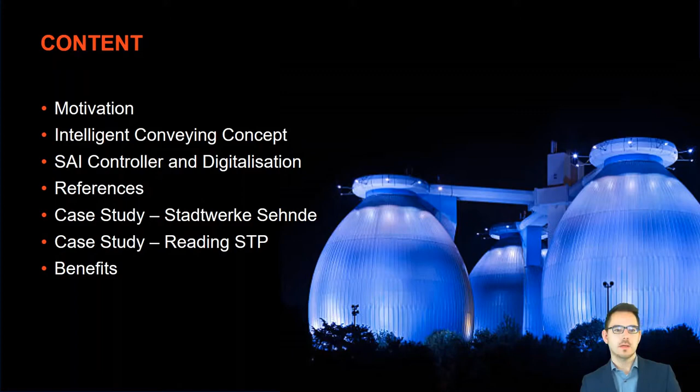I would like to start with a short motivation of this topic - why has SEEPEX investigated this new conveying technology? That is followed by a short description of the conveying concept and also the SAI logic and control strategy. Then we switch over to the practical part, where I would like to show you some references and also two case studies that we've drawn from Stadtwerke Sehnde in Germany and also Thames Water in Reading, where we've investigated the TCO and the savings that we could achieve by these systems.

But let's start first of all with the motivation. So where did we investigate a new product for the conveyance of dewatered sludge? That comes from the market - we see increasing requirements, especially due to newer EU regulations for fertilization and sewage sludge regulations.

We see that the common processes of handling your dewatered sludge are changing. Phosphate must be regained, and it cannot go to the landscape anymore due to nitrate loading in your grounds, so we need to go to incineration more and more. These established processes on our plants are changing, and since the building density of most wastewater treatment plants is rather high, it quite often occurs that longer distances need to be conveyed with the dewatered sludge.

Another aspect we see here is that life cycle costs are more often considered, especially by larger water authorities, and that's directly connected to energy efficiency of your equipment. Especially for larger equipment on your plant, easy and fast maintenance is always an issue because it's always related to the downtime in your processes, and to handle and stay with your process, maintenance is always important.

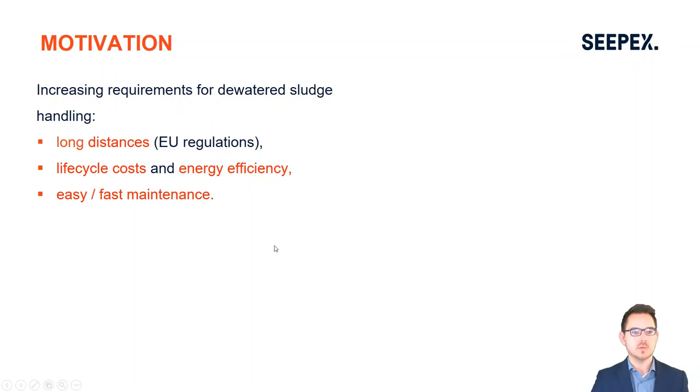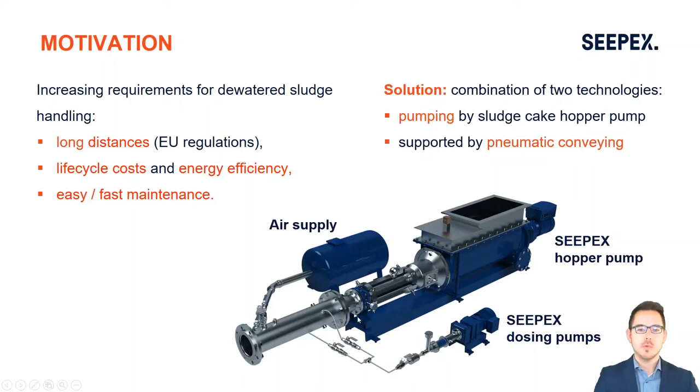Our solution is a combination of two known technologies: pumping by a progressive cavity pump - that's really SEEPEX's bread and butter product - here a hopper pump conveying the dewatered sludge, combined with and supported by a pneumatic way of conveying, which we call pneumatic dense phase conveying.

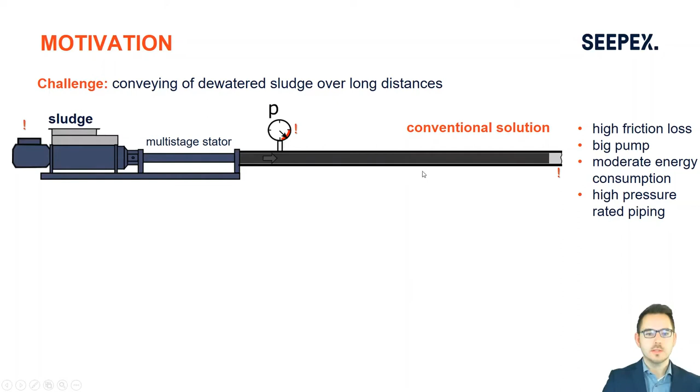Let's come first to a comparison with the conventional way of conveying dewatered sludge to see the benefits of SAI. The challenge in conveying dewatered sludge lies in the high viscosity, and this high viscosity leads to rather high pressure losses in your pipework from the usual way of pumping it through the system. In the end, we're restricted by these pressure losses in the distance we could convey, because the pressure increases more and more, and you need very large high pressure pumps to overcome this. High pressure pumps come with a large motor and consume a high amount of energy. On the plant side, you need high pressure rating for all your piping and equipment, which is quite expensive on the investment side.

If you compare this to smart air injection, the main benefit and feature we generate by SAI is that we bring down the discharge pressure to a very minimum of only 2 to 3 bar. That's achieved by this discontinuous way of conveying the medium in plugs - plugs of dewatered sludge are generated by our pump conveying the medium into the discharge pipe.

We surround it with a lubrication fluid, usually a polymer solution that's always present on your plant. Then we build up these 10 to 15 meter plugs of medium, and once built, accelerate those plugs by pneumatics - using the pneumatics to convey it further down the line and shoot these packages of dewatered sludge. This is used very purposefully, only for a short term, and helps us reduce the pressure inside your pipework to a minimum of only 2 bar, because we reduce frictional losses.

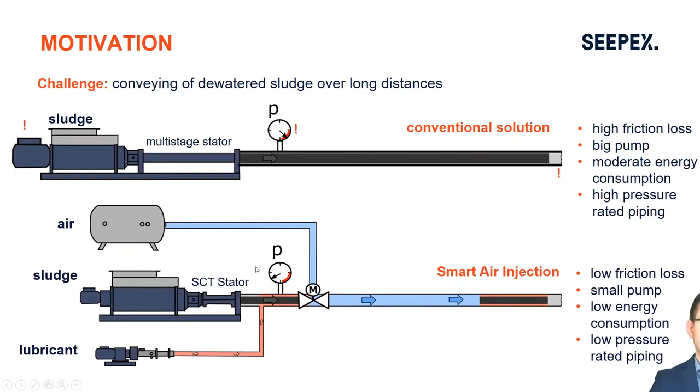That leads to the fact that we only need a small pressure pump, which comes along with a very small engine and motor. And on the other side of your plant, you can also apply very low pressure rated pipework, and plastic pipework can be used for multiple hundreds of meters of conveying distance.

What are the benefits you receive? We reduce your operational costs significantly, because the total energy consumed by an SAI system compared to a conventional solution is much less. Maintenance costs are also reduced because spare parts are small and cheaper, and due to the low pressure, the lifetime of all components is highly increased.

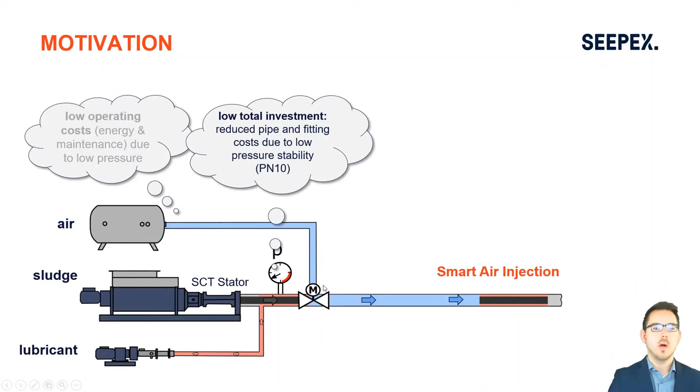Another effect is that we reduce your investment costs, since all the pipework and fittings are only low pressure rated at PN10, compared to conventional solutions that are often PN100 and even more.

We've achieved a very flexible pipework layout that can be planned for your plant. Multiple bends are not an issue for us, and vertical elevation of up to 30 meters and more can be achieved by smart air injection.

We also achieve a very long transportation distance due to the fact that we use pneumatic dense phase conveying. We could achieve 1 kilometer of transportation distance, which is not possible with any other conventional solution.

We reduce downtime of the process because we use a small pump with maintenance-in-place abilities, so you could exchange any wear parts on service issues in less than 1 hour, without any dismantling of pipework. And since we only act against 2 or 3 bar of pressure, the lifetime of all components is highly increased.

We have pneumatics in our system, and that's why we also have the ability to do pipe cleaning before longer downtimes, especially in winter time where you usually need backup heating for your pipework before longer downtimes.

That's not required with an SAI system, because we blow the entire pipework free with pneumatics and air before longer downtimes over the weekend. If you restart on Mondays in winter, it's not an issue, and you can restart your process without any backup heating, which is also a good benefit on the investment cost side for your plant.

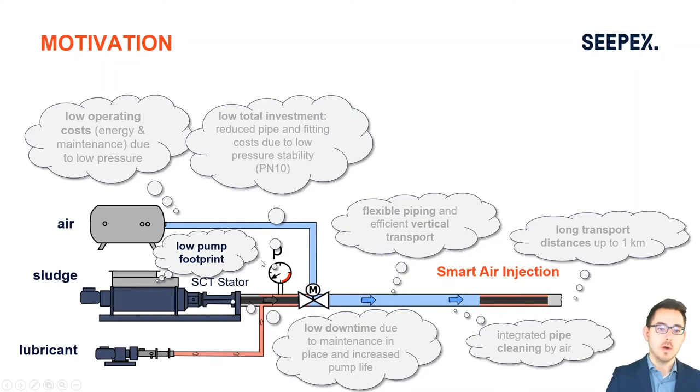If I tell you now that we have a pneumatic system that is very efficient, you might say, I don't believe you. That was also my first reaction, because what I learned in university is that compressors are nearly the worst case scenario on efficiency, since nearly 90% of the energy goes to heat.

But you have to distinguish between the different types of pneumatic conveying to see why it could be efficient. Usually we split into 3 types of pneumatic conveying. First is lean phase, where granular powders are blown with constant air at very high velocities through your pipework. That's rather inefficient, because you have a high amount of air consumed relative to the material conveyed.

Then we have intermediate phase conveying, where you have a swimming bed of medium at the bottom of your pipework, and above it this type of lean phase conveying. Here too, the ratio of air to medium is not the best.

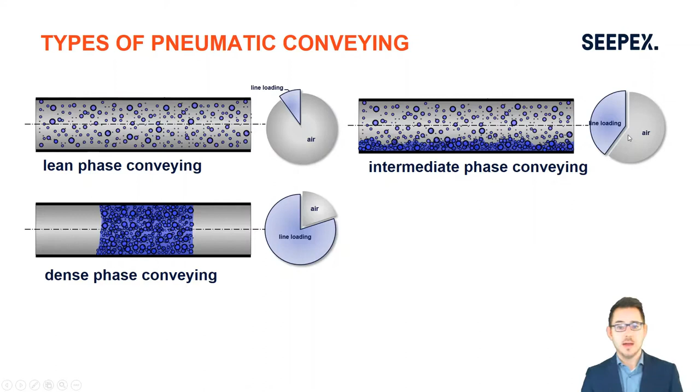What we really use, and the only way that could be efficient, is dense phase conveying. Here you pre-compact packages of dewatered sludge that are then accelerated by purposeful, short air injection and shot down the line like a pneumatic post system.

We even increase the efficiency of these systems by lubricating those plugs with the already present polymer solutions. We build up a layer around those plugs in order to reduce the frictional losses from the pneumatic conveying.

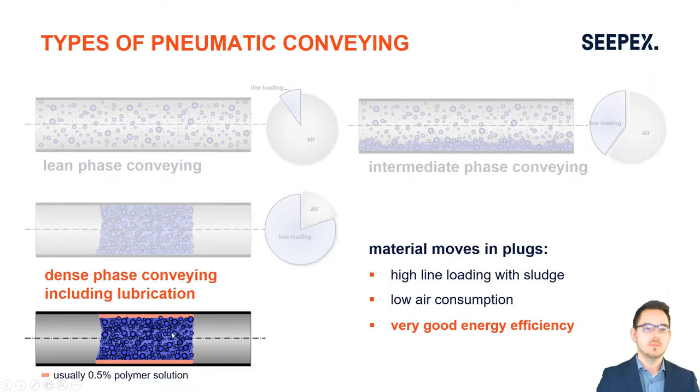Another effect we make use of is the shear thinning rheology of both fluids. Both the dewatered sludge and the polymer solution are highly shear thinning. Shear thinning means, as the name suggests, that under high shear rate the fluid gets thinner and flows more easily. That is directly expressed by this diagram.

So the viscosity is decreasing the more you are shearing your fluid. And that's what we really need, and that's what we use here on these cases. Because the important point is that the shear rates are directly proportional to the velocity inside your pipework. Where you see high shear rates occurring in your pipework, that's where you have the high velocity gradients.

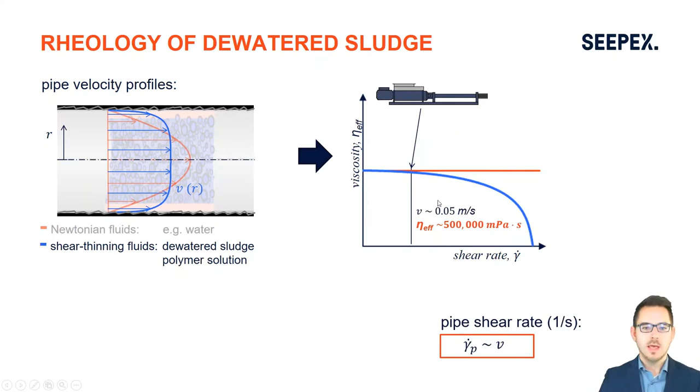Directly in the boundary layer of your pipework, where the high frictional losses occur, we have the highest shear rate. And if we accelerate those plugs by SAI, we increase the shear rate at these locations where the pressure losses occur. If you compare now in this diagram, the usual way of pumping, acting at very slow velocity when the medium is moving by 0.05 meter per second through your pipework, we are in this region where the viscosity is rather high.

For high dewatering content, you speak here about 500,000 mPa·s that could be achieved. But if you accelerate those plugs of medium to very high velocities of 5 meters per second, you reduce at the same time temporarily the viscosity in this boundary layer region of your plugs, where the high shear rates occur. And the factor 10 in reduced viscosity goes directly proportional to the pressure losses, and that's what makes this system so efficient.

A good example to demonstrate this effect is ketchup. It's a children's experiment that you usually do at school in physics, where you put a golf ball on top of a bowl of ketchup, and due to the high viscosity it's sticking on top. But if you let this golf ball fall from a certain distance into the bowl of ketchup, it fluidizes the ketchup, because of the high shear rates that come to this medium on impact by the golf ball on this layer. And that's what we really use here by our SAI system.

Let's look at the process. So how does it look like when the process is started? At the beginning of the conveying, we have nearly zero pressure inside our discharge pipework. Then only the pumps are moving and working, generating this plug material inside the discharge pipework. The pressure signal is successively increasing inside your pipework.

So that's really a measurement signal that we have drawn in a plant in Sweden. Once we reach a region where the plug length is nearly optimal for our conveying process, we open up the solenoid valve, flood the system with 10 bar of compressed air. This overcomes the frictional forces of the plug and accelerates it. So we see a pressure peak in the signal, and then it moves down the line, accelerated to these high velocities until it reaches a destination, which is here inside a silo bottom.

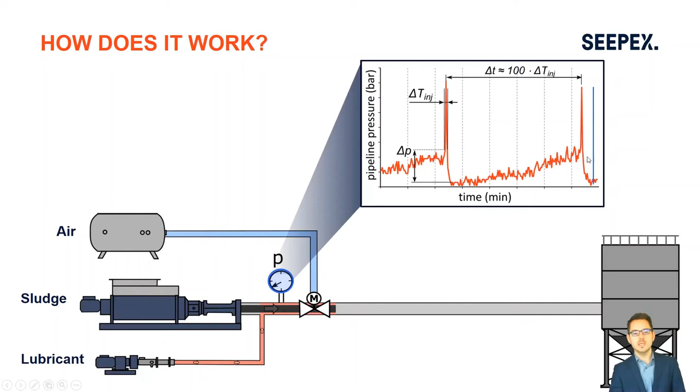And if the pipe is free again, you see that the pressure is decreasing to a very minimum of nearly zero pressure, and the process restarts again.

So let's summarize, how does it work, and how could we reach these very, very low pressures inside the pipework? That's due to 3 reasons. First, we use a lubrication of those plugs in order to reduce locally the frictional losses in the pipework. We make use of a pneumatic way of discontinuous conveying, which is called dense phase conveying. And we make use of the rheology of our fluids, which is shear thinning, and the viscosity is decreased temporarily under high shear rate by this conveying process.

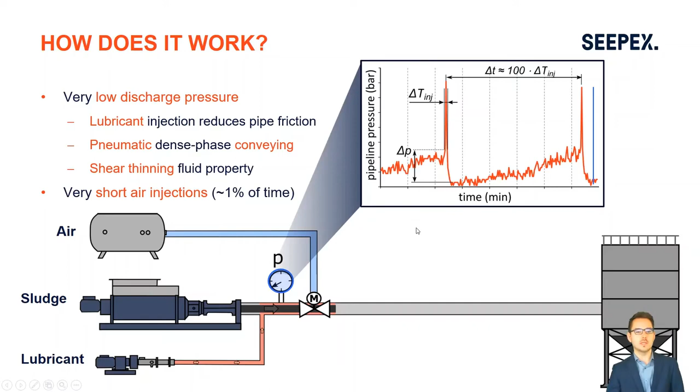In the end, this leads to a very good efficiency, and we only use air very short-term and infrequently in our system, which is roughly around 1% of the total time.

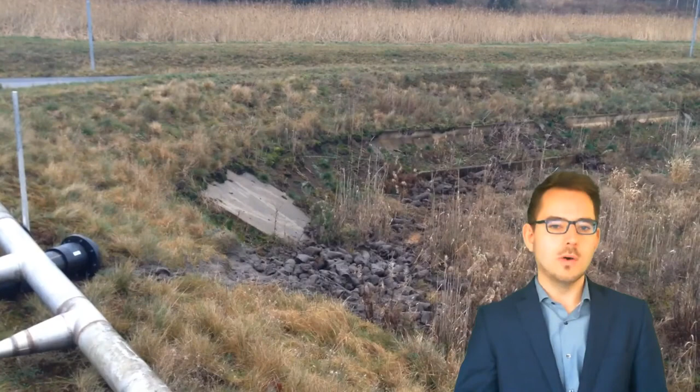If you look now to the pipe outlet, after 500 meters, the outlet where the plugs are shot onto the field - after the injection of air, one plug gets out and is shot onto the field, and that's how it looks like when it comes out. So it works also for 500 meters, and for this case we have not reached more pressure than 5 bar, so we are not at the real limit to convey dewatered sludge over a distance of up to 1 kilometer.

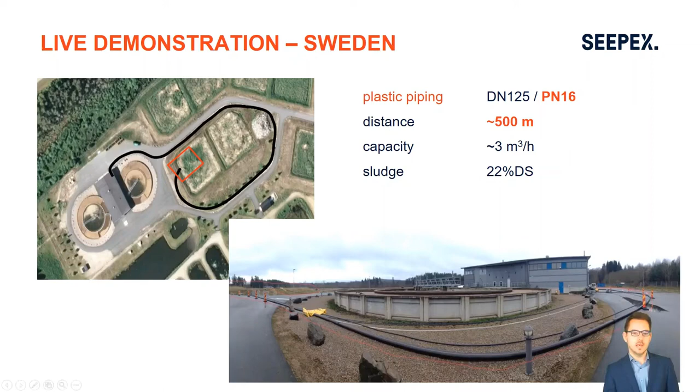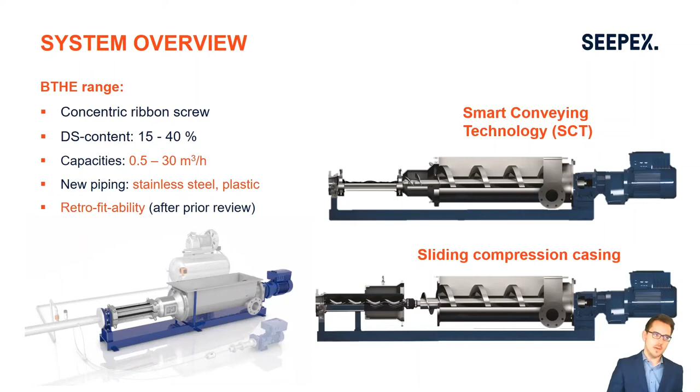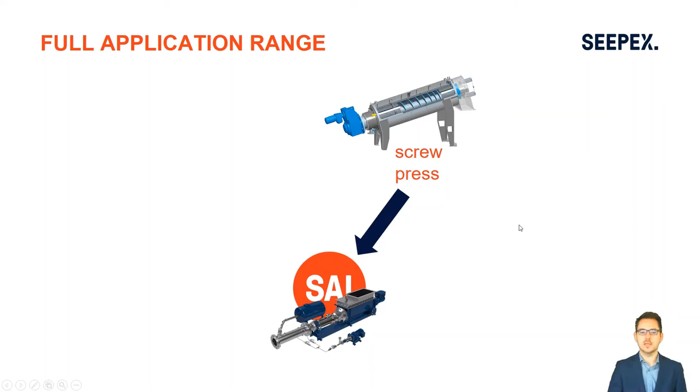The application range we can handle with SAI covers nearly all systems. We have screw presses also fitted with SAI, belt filter presses used for dewatering and conveying with SAI, and filter press installations and centrifuges.

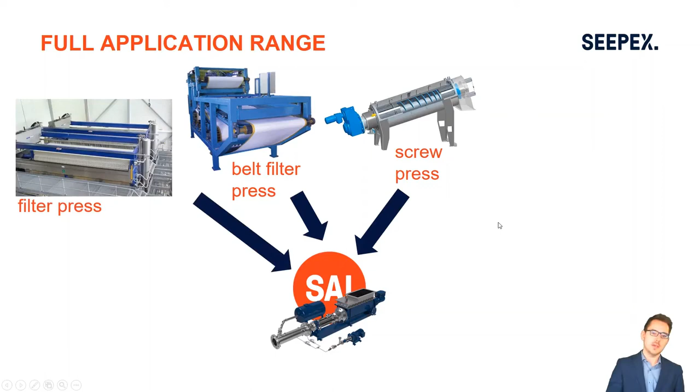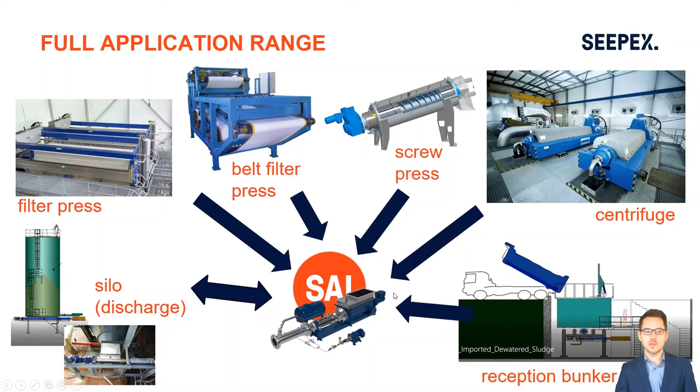We have used SAI to feed into a silo and also as a silo discharge pump placed below the silo. We also have installations placed below a reception bunker, where imported sludge is further conveyed by smart air injection systems. So nearly the full application range of handling dewatered sludge can be covered by smart air injection.

The control logics come together on a so-called SAI controller. What we offer from SEEPEX is a full package unit, meaning a partially automated system product. We include all required machines, all functional components like sensors and actuators, and the control logics, all fed into this SAI controller, where a full visualization of the process runs.

We also have monitoring capabilities and fault diagnostics. This system fully controls itself with regard to flow rates of sludge and lubrication, and air injections are triggered with an optimization algorithm to achieve the best energy efficiency. Safety functionalities are ensured by our control logics, which can be easily integrated into your superior control system through common feedback signals.

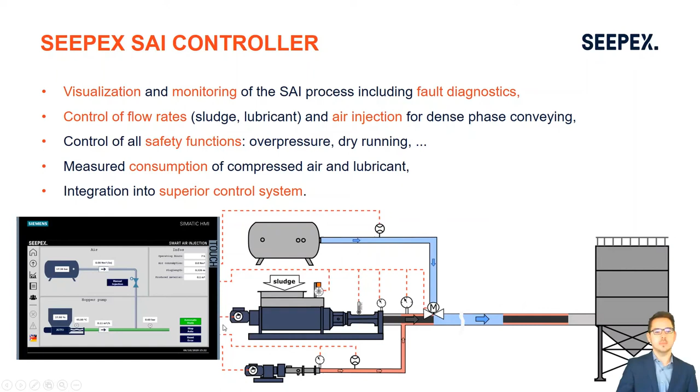We also have a second implementation of this controller logic on Siemens, which comes as pre-compiled component software parts. So if you already have a Siemens controller in your system, we can easily upgrade it with our Siemens logics, and you then run our SAI control logics on your own PLC.

This SAI controller can also be easily integrated into connected services. This enables you, via Bluetooth signal, to get access from everywhere with your mobile phone to the data of your system and how it runs. It also enables a mobile notification service, so overnight or for the service team, you get a notification or warning on high wear or any issues that might occur on your system.

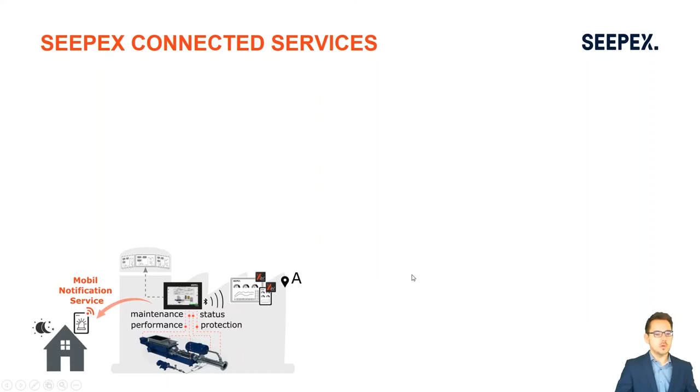And if you have multiple systems monitored by our pump monitoring systems, we can also go into the cloud, where you have an overview of all the pumps running under your pump monitoring system.

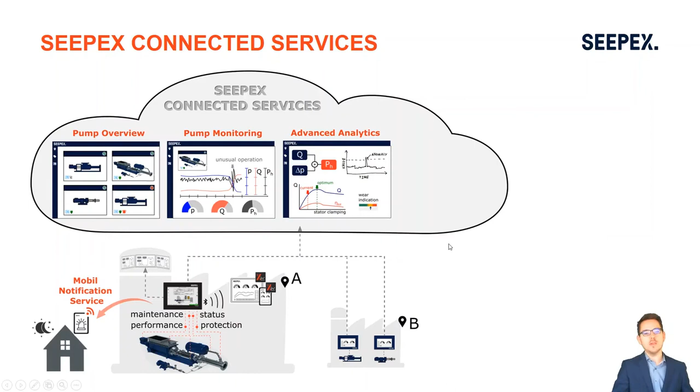You can get access to every pump that is running and see historical data, trend analysis of the pressure, the flow, and also the hydraulic power. We also have the capability with our advanced analytics to do anomaly detection, to define separate KPIs to investigate your system, and the possibility to have a wear indication where the pump operation is compared to the characteristic curve, so you really know about the wear status of your equipment.

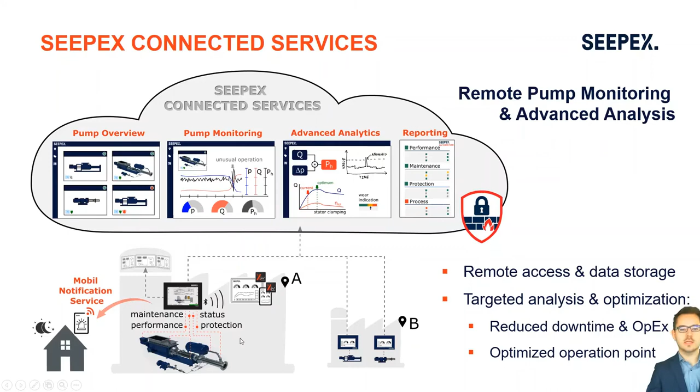In the end, you will receive a reporting every month, where you get a quick overlook about the performance of your system, about maintenance issues, protection issues, and also, if required, on the entire process running in your system.

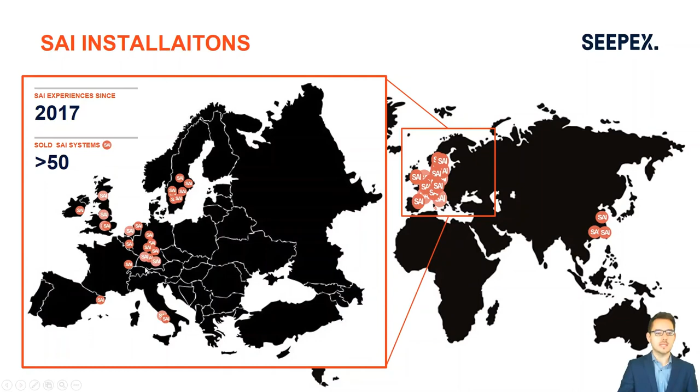Let's come to the more practical part, SAI installations. We are now, since 2017, on the market with smart air injection. Until now, we have installed more than 50 systems in the market, especially here in Central Europe, where most of the systems are in the Nordic region, in Germany, in UK, some in Italy, France, and also Belgium and Netherlands. But let's go into detail for some of those reference plants.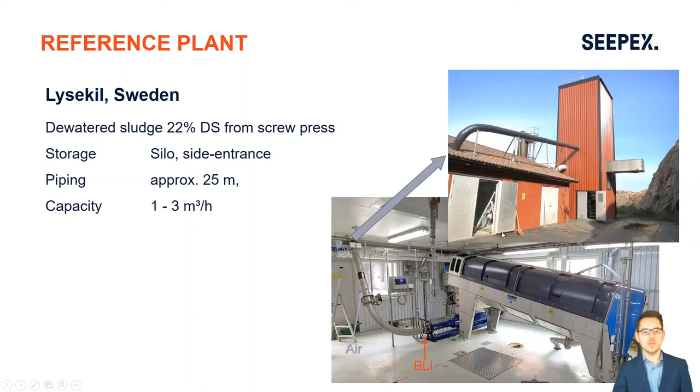What we really see here is an adaptive algorithm that we have triggered. Independent of the fill ratio of this silo, we have adapted the parameterization of the system in order to optimize the energy efficiency of the system.

We have another installation in Sweden, in Strängnäs, where a centrifuge is used for dewatering the sludge onto a dry solid content of 24 to 27%. Then it goes out of the pump and is split to 2 different pipe routes.

We have also integrated these valves into our control logics, so by the controller you can decide if you would like to feed route A or route B. It then goes through underground pipework out of the field and is fed onto a ground storage location—those are the 2 locations where we can decide where the sludge should be conveyed to.

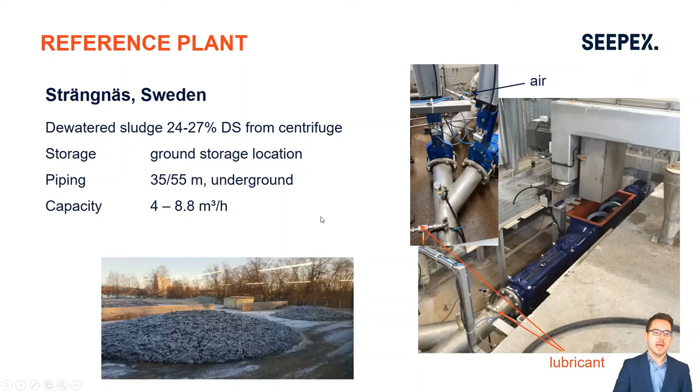The distance was 35 to 55 meters, and the capacity in this case was 4 to 8.8 cubic meters per hour.

Another installation in Hallsberg, Sweden, also has a split directly after our pump to 2 different locations. Here too we have a ground storage installation and underground piping of 50 to 70 meters. The interesting thing here is the very large cone that occurs for this underground conveyance, so you need very few outlet points on the ground storage. The diameter of this circuit is around 30 to 35 meters, giving a good distribution of your sludge on an open area.

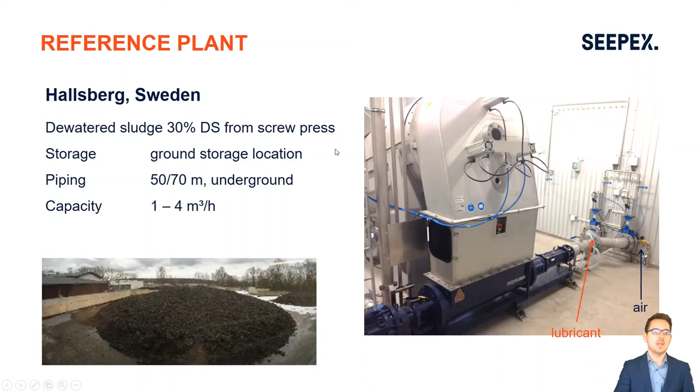Another installation here in Belgium, in Genk at Aquafin, is where dewatered sludge is dewatered by a centrifuge to a content of 26 to 30%, and it goes from this pump installation out of the building and directly into a silo. Here it was interesting that we have 2 different types of silo feeding: one from the bottom of the silo, and one where the pipe runs out of the silo to the top and enters the sludge at the top location.

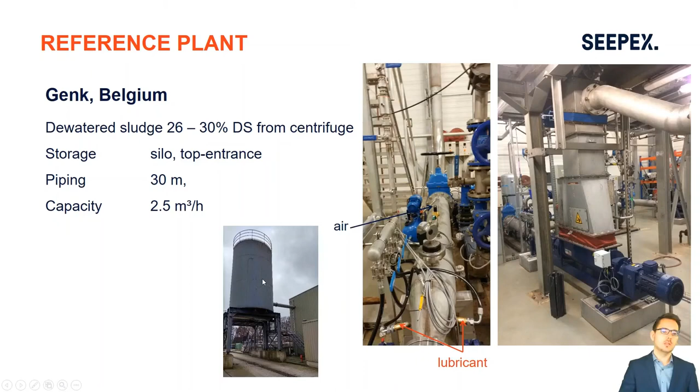We've done an investigation on the energy efficiency and found out that the most efficient way for SAI to convey into a silo is to go outside the silo to the top and feed the silo from the very top.

A temporary installation, also quite interesting, is here in Heerenveen in the Netherlands, where we had a 3-month installed mobile unit with a centrifuge running on a truck. From this centrifuge, we bring it out into our pump installation. We've installed a scaffolding which goes up here to the silo, and a plastic pipework that was also temporarily installed.

After the pump, you see our spool piece installation, where the lubrication fluid comes in on a circumference into the pipework, and we have the solenoid valve where air is injected. This runs for 3 months. The distance was roughly 60 meters in a plastic pipe, and the capacity ranges from 1.5 cubic meters up to 3.5 cubes per hour.

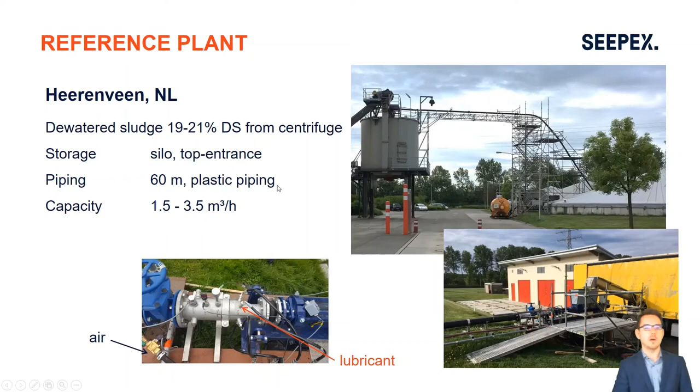Another installation at Veolia Water in Osberstown, Ireland, was here also with centrifuges. Dry solid is 26%, and the interesting thing here is that we have a complex type of pipe routing.

So we have here 3 centrifuges installed in parallel, where we see one of the first pumps where the pipework goes out. We are injecting air at this vertical pipe location, and it goes to one main pipe. We have in the background also a second pump where a centrifuge is placed on top, and this also feeds into the same main pipe.

And from the back, you see that also one pipe is coming from the back location, where we have a third centrifuge that is feeding into the main pipe. This main pipe goes straight through the building and comes out of the building, and is then split onto 2 different silo locations.

So this is all integrated into our control logics, and you can decide on the SAI controller if you would like to run centrifuge A, B, or C, or if you would run 2 in parallel, and also if you would like to feed onto silo 1 or silo B.

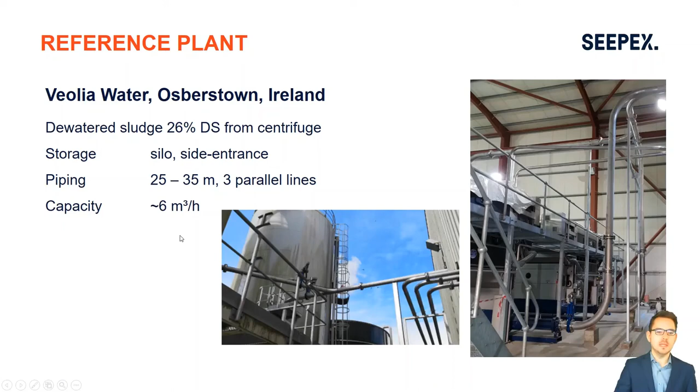The piping distance is only 35 meters, and the capacity in total is 6 cubes per hour. We have received very good feedback from Alan Whitty, who we could denominate here as a reference, and who sent us a good comment by mail that we could place here. He has been handling sludge cake pumping for 17 years, and he was extremely impressed by this SAI installation, and it has fundamentally changed the way he would approach sludge cake transfer and design in the future.

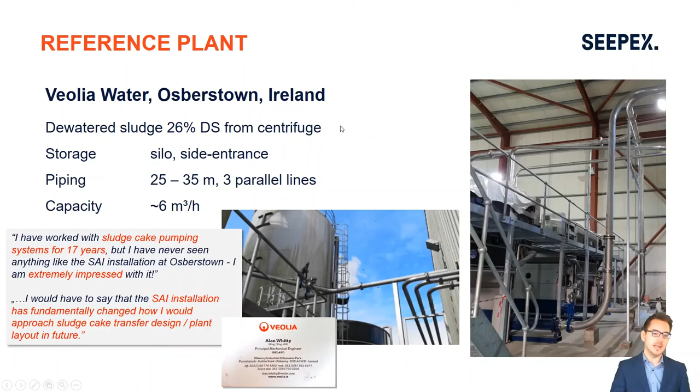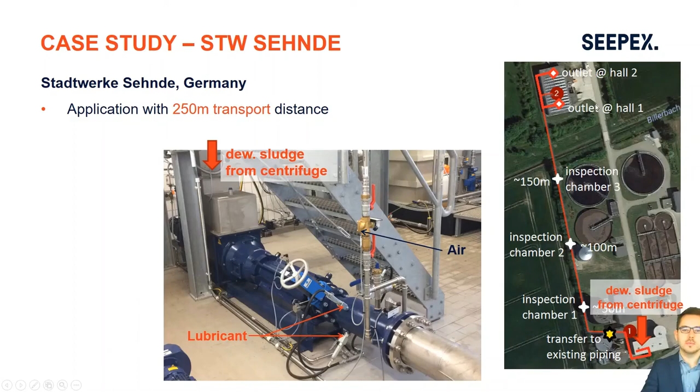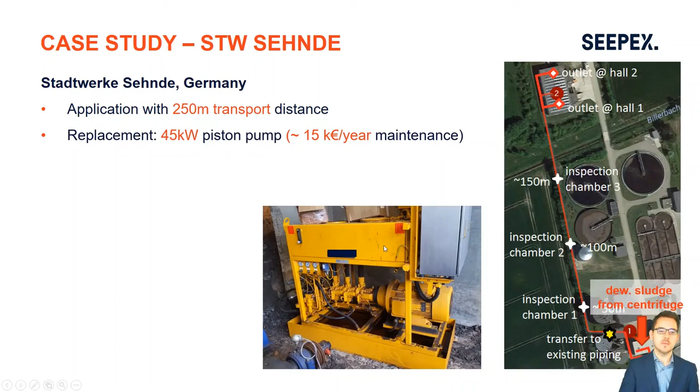The initial installation was a piston pump with 45 kilowatt that was replaced, and the customer's pain point really was the high maintenance costs of this installation, which ranged around 15,000 euros per year. The challenge for this installation was that we had to reuse the existing steel pipework, and initially we had done a camera inspection and the pipework looked quite well, so we decided to reuse it.

After the installation and half a year open to atmosphere, we did a second investigation. Here's a picture from it — you see it was highly corroded. That was quite challenging for the SAI system. Nevertheless, we have arranged it, and this system is running since December 2017, and the customer is satisfied.

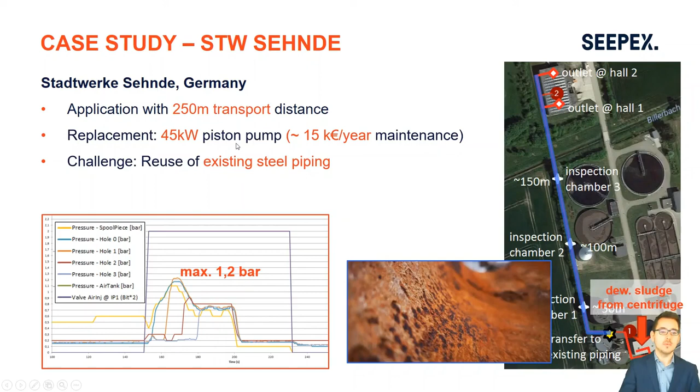We have replaced no components since then, and here's how the pressure signal looks like. You see that we inject air, and the pressure signal is increasing at the different locations at the different inspection chambers down the line. And when we enter sludge hole 1 or 2, in the end, the pressure decreases again to nearly 0, and the solenoid valve closes again, and air injection is done and the sludge is conveyed to the destination. All this is done over 250 meters at a pressure level below 1.2 bar.

So let's look at a video. How does it look like when it enters the sludge hole? You see here behind me, it's like a mole throwing up a hill that is breathing, and that's really how it looks like — I'll show it again — when a sludge plug is entering the sludge hole location.

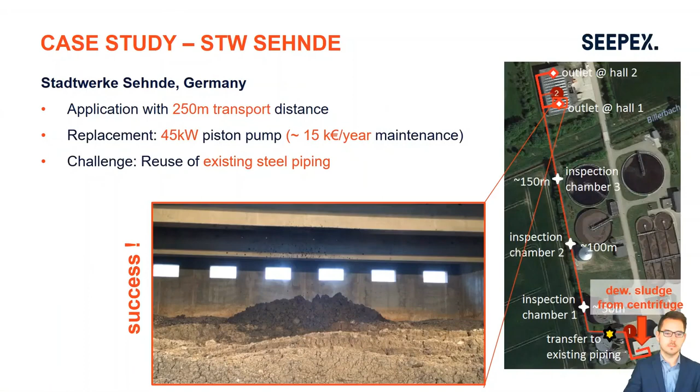We have also done a TCO, a life cycle cost analysis, together with the customer, and investigated the initial costs of the piston pump in regard to maintenance, lubrication costs and power, compared to the current situation where SAI is combined with the existing steel pipe work.

We consume at the moment a rather high amount of lubrication, nevertheless it's nearly half of what was required on the piston pump installation, but that's only due to the corrosion present in the pipework. If we improve it further with plastic pipework and new installation, we could achieve a higher saving potential with this system.

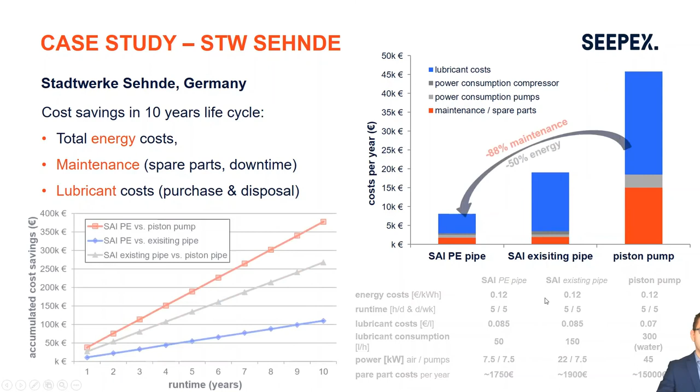In the end, we have achieved a maintenance reduction of around 88% in maintenance costs, and energy costs could be reduced by 50% compared to the piston pump solution. Accumulating the cost savings over 10 years of operation, the customer is able to save around 250,000 euros by changing to the SAI installation. And if he goes for the plastic pipework and improves the system further, he has an additional potential to save 100,000 euros.

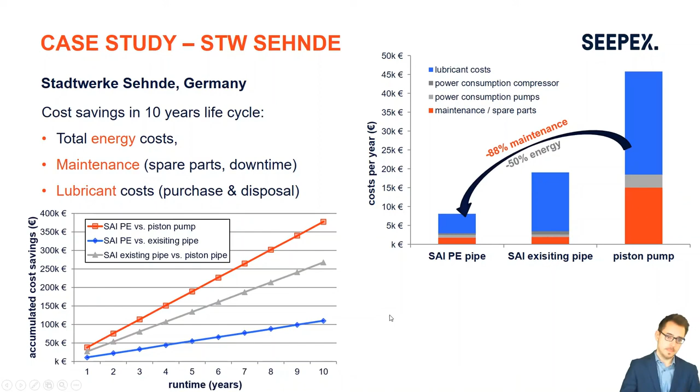Let's come to the second case study, a temporary installation at Thames Water in Reading. It was an existing plant where we had already exchanged a piston pump for a multi-stage high-pressure progressive cavity pump 5 years ago. We temporarily installed our control logics of SAI combined with a mobile compressor unit and our control logics for injection of SAI.

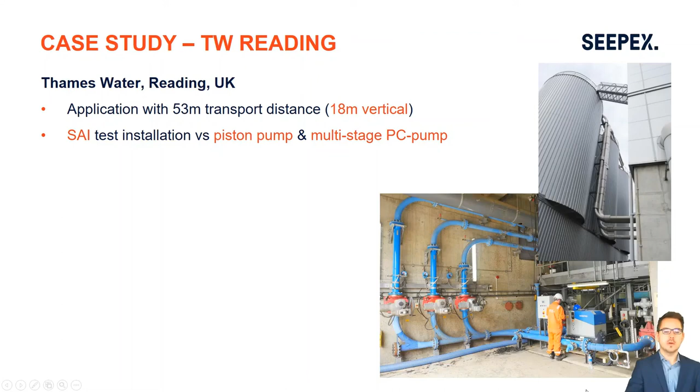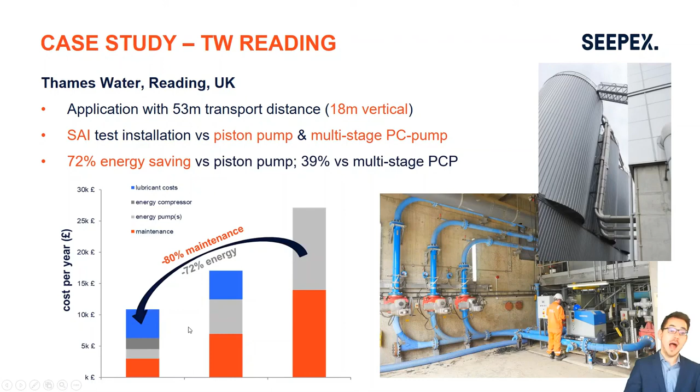At this installation, we were able to compare 3 different systems: the piston pump solution, which exhibits high maintenance and energy costs; the currently installed multi-stage high pressure pump solution; and the SAI installation. We were able to achieve a reduction in maintenance costs of around 80%, and energy costs could be highly reduced by 72%.

Let's summarize the application. So what can we do with smart air injection? It's especially designed for the conveyance of dewatered sludge in the wastewater industry.

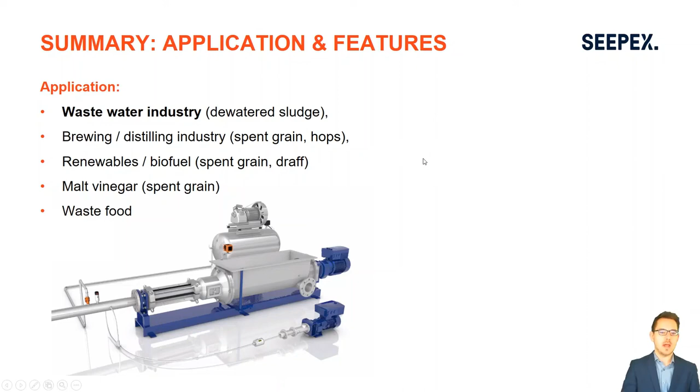Nevertheless, we have already applied it for different other applications, quite successfully also for the brewing and distilling industry, where we use it for conveyance of spent grains and spent hops. We have also used it in the renewable energy and biofuel industry for conveying spent grains, and also for malt vinegar production in spent grain conveying. Waste food with a BTM pump has also been combined in an SAI system, conveying a mixture of waste food. But in the end, our main application is the conveying of dewatered sludge.

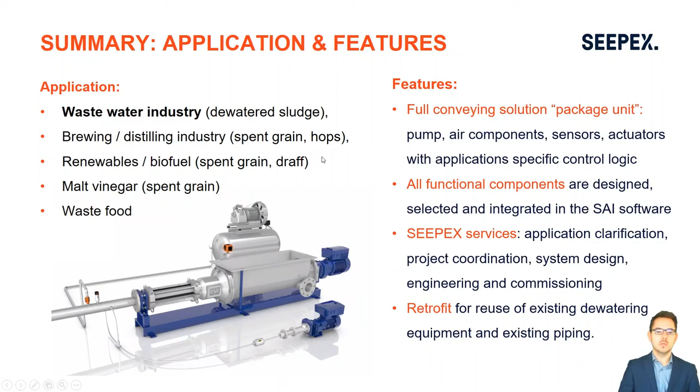The features we enable for you are a package unit where you get all the functional components like pumps, air components, sensors, and actuators integrated into our control logics. The SEEPEX services include full clarification of your application, and we customize the system to your needs. If you require a retrofit, we are also able to upgrade your system with an SAI system.

Let's summarize. SAI is an intelligent conveying concept that enables you to convey medium up to 1,000 meters of conveying distance. It helps reduce operational costs in regard to power consumption and maintenance costs. We could significantly reduce your downtime because of the very low discharge pressure of only 2 to 3 bar, which increases the lifetime of all pump components, and we enable easy maintenance concepts, maintenance in place, which takes only 1 hour maximum for every service work.

Investment costs could also be reduced because you need only this very low pressure rating of PN10 instead of PN120 or even more. And we enable process monitoring and optimization with our SEEPEX connected services.

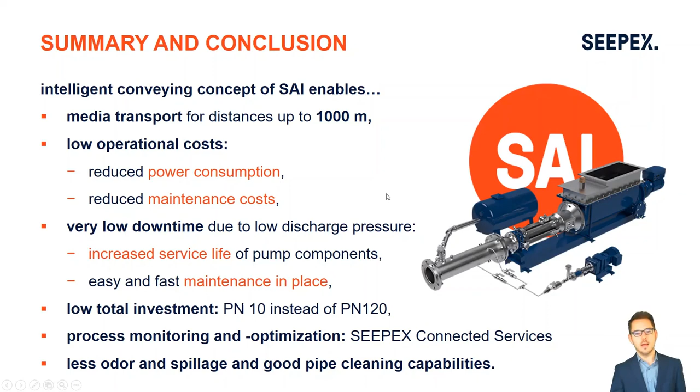If odor or spillage is a problem, the system is completely encapsulated. It's a closed system, and we have integrated pipe cleaning capabilities. So if we have longer downtimes in the winter and the problem of freezing, you don't need any backup heating for your pipe work because it's blown free by air after every run, and then you can rerun it after longer downtimes quite easily. Thank you for your attention.